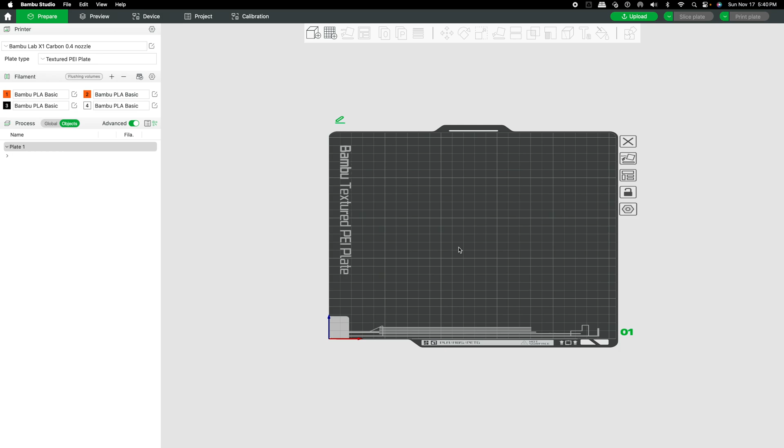First thing we're going to do is right click on the plate and add a cube.

We're going to resize this by using the scale tool. Make sure uniform scale is unchecked so you can specify the sizes that you'd like your luggage tag to be.

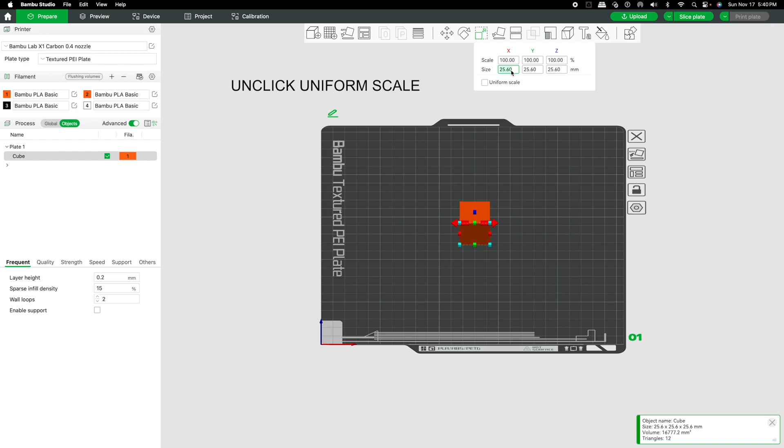So my luggage tag is going to be 98 millimeters by 44 millimeters by 4 millimeters thick. And that looks pretty good.

Click on the luggage tag. Now we can add the text. I'm going to use Roboto Black, 18 point, thickness 2 millimeters.

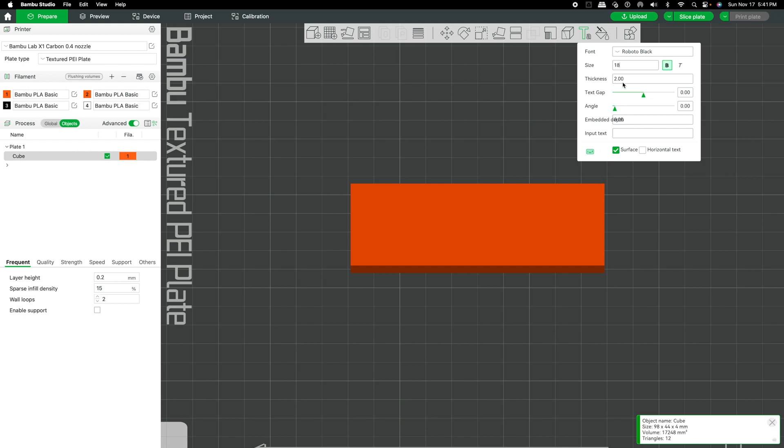Where it says embedded depth, on my computer it's hard to see. I'm going to make this 2 millimeters. Add my text.

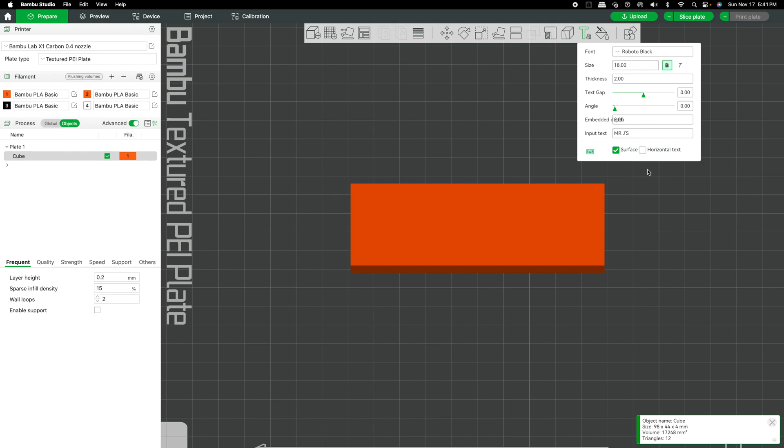There's my text. I'm going to drag it over here. Now you can eyeball this to where you'd like it to be eye pleasing on your luggage tag. I'm going to measure mine in just a moment, so I'm just going to place it.

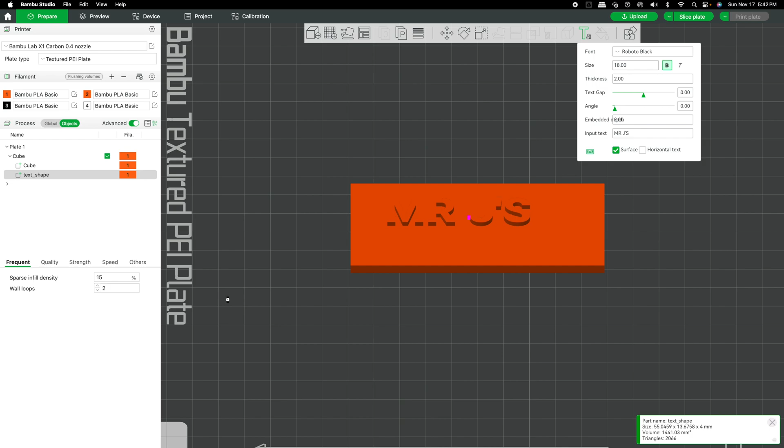I'm going to go to the left here where it says text shape and right mouse click on text shape. I'm going to change my font and change my filament to black. And there, got my text in black.

So I'm going to click on the luggage tag again, and I'm going to add just one more text. Change the font.

Change the size of the font, leave the thickness alone, embed it 2 millimeters just like the other one, and we're going to say workshop.

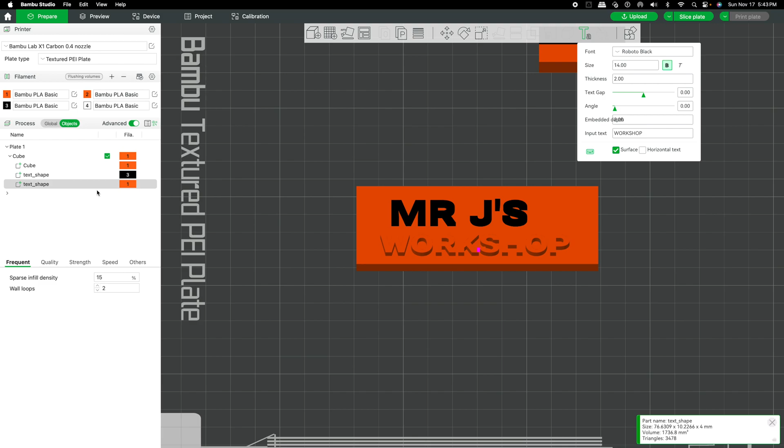Just eyeball it here for right now. I'm going to reposition that in a moment. Going to go to the left of the screen under text shape, and I'm going to change the filament to black.

Okay, now I'm just going to look at this closely and make some adjustments. I'm going to go to the left side of the screen, select Mr. J, and go to move.

I'm going to move it over -5 millimeters, and I'm going to move it up 7 millimeters, and I'm going to leave the 2 millimeters alone.

I'm going to go back to the left side of the screen and select the workshop text. I'm going to move that also -5 millimeters so they're centered.

And I'm going to move it down 7 millimeters by adding a negative number. I'm going to leave the 2 millimeters alone.

And we'll see what that looks like. I like that, so I'm going to go with that.

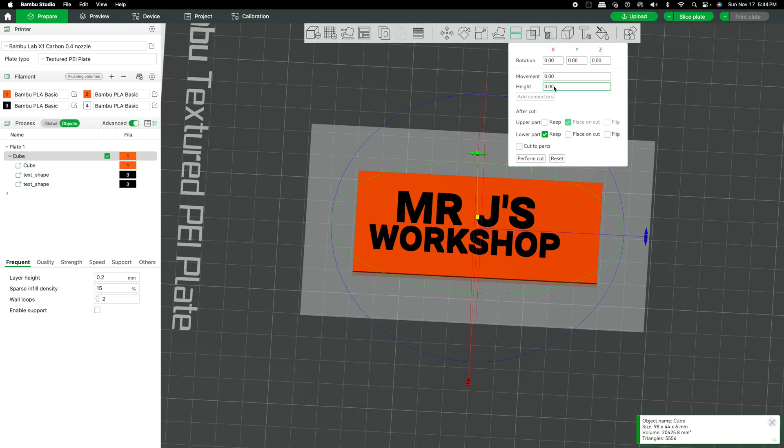Now I'm going to select the luggage tag again. I'm going to say slice, slice at 3 millimeters. I'm going to keep the lower part, and I'm going to perform the cut.

All right, so we've got our luggage tag, we've got the text, and now all we have to do is add the slot for the lanyard to tie into.

The way we're going to do that is we're going to click on the luggage tag, right click, add a negative part, select cube.

And you can disregard this here, it's just some information about the object box. We could talk about that at another time.

Now that we've got the cube here, you can eyeball this also, but I'm going to precisely measure it. So I want to scale this, and I'm going to say...

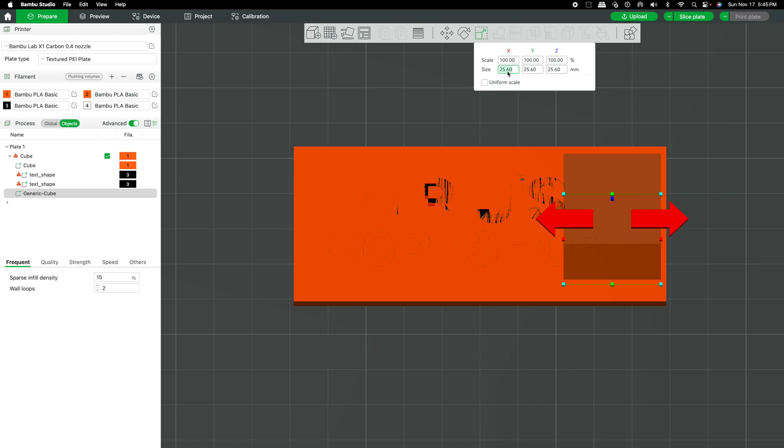4 millimeters wide by 20 millimeters long. And we're just going to say 5 millimeters tall.

I just want to make sure it goes through the luggage tag, and it's not there.

I could... I'll move that by hitting move. First, I'm going to position it.

I'm going to say 44 millimeters. We're going to say 0 here to keep it on center of the plate.

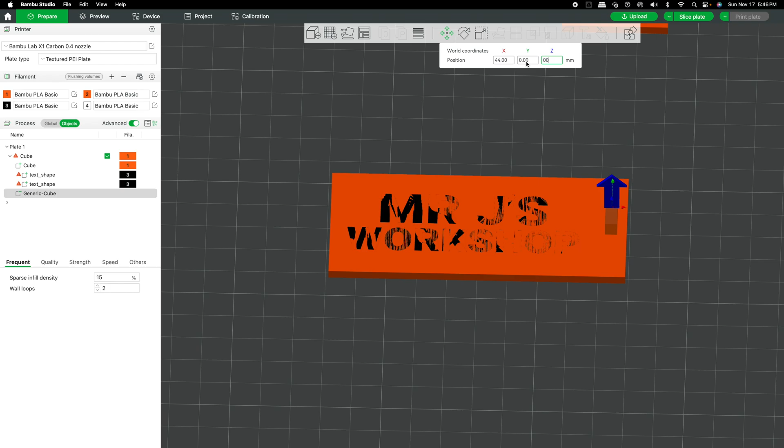And then for Z, I want it to be on the plate, so I'm going to say 0. And now it's on the plate.

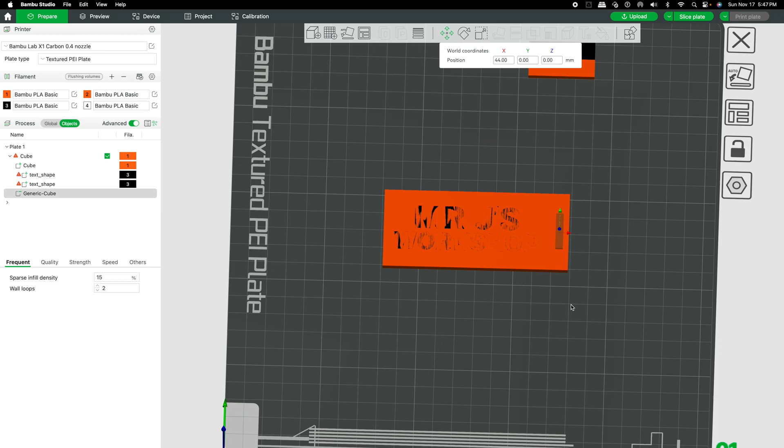Oh, what I wanted to do was rotate this luggage tag so the lettering is sitting on the plate itself. I like the finish of the textured plate on my luggage tag, so I'm going to rotate.

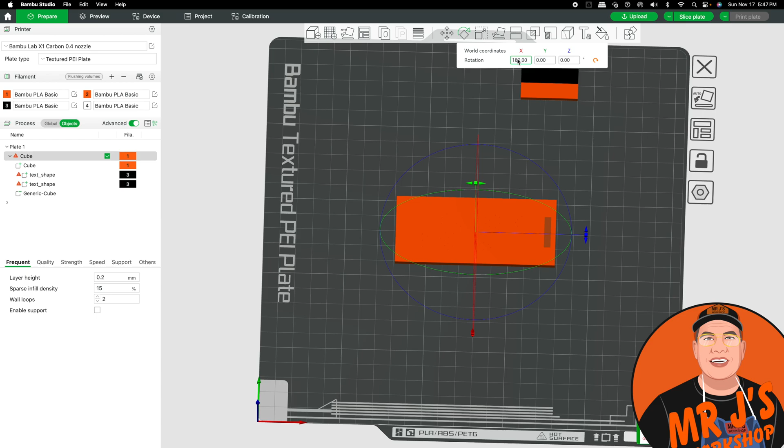I'm going to rotate my tag so it sits on the plate. And if that worked out right, it's on the bottom now.

So the only thing now to do is say slice, and there it is.

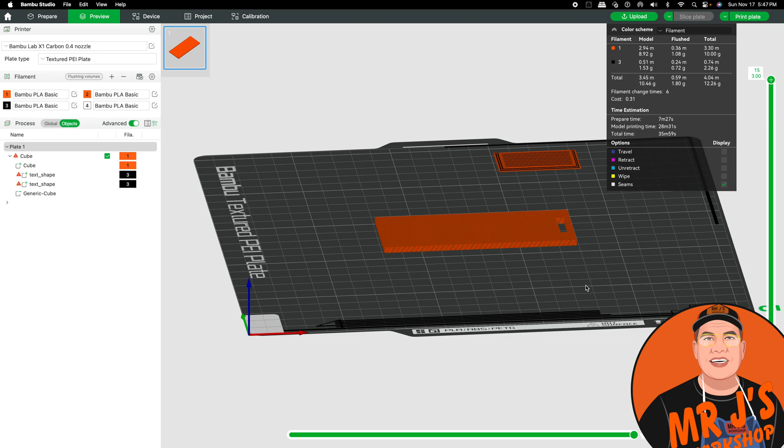And if you liked everything here, then you would just send it to the printer.